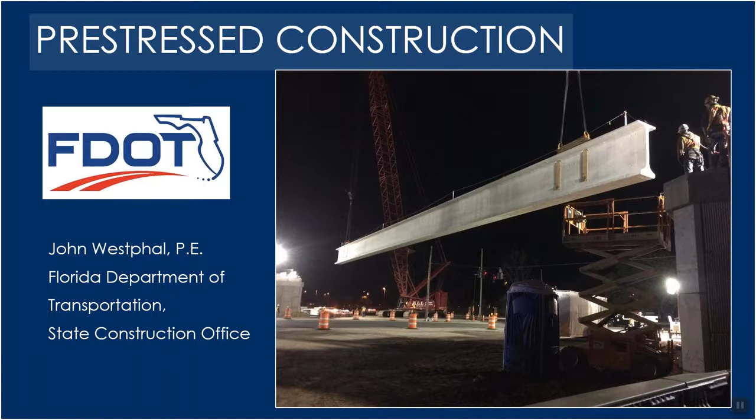And now, today's guest. Hello and welcome. Today we're going to be talking about pre-stressed construction, what it is, and why it's of importance, especially in the state of Florida and as it relates to Florida's transportation system. My name is John Westphal. I work for the Florida Department of Transportation, State Construction Office. So let's get into it.

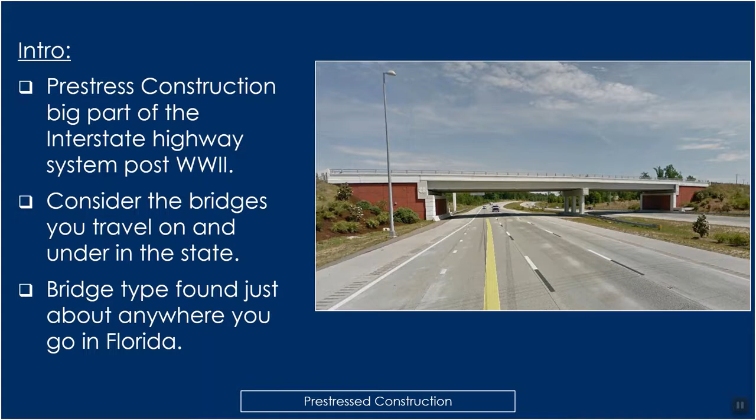Post-World War II, pre-stressed construction played a pretty vital role in the interstate highway system promulgated by President Dwight Eisenhower. Consider all the bridges that you drive on and under and along. More than likely, if you've come to work today and traveled over a bridge, it was likely over a pre-stressed concrete girder bridge. It's a very prevalent bridge type, superstructure type, found virtually anywhere in the state. It is the workhorse superstructure type in Florida, owing to its ease of construction and ability to be erected in a fairly straightforward and easy manner.

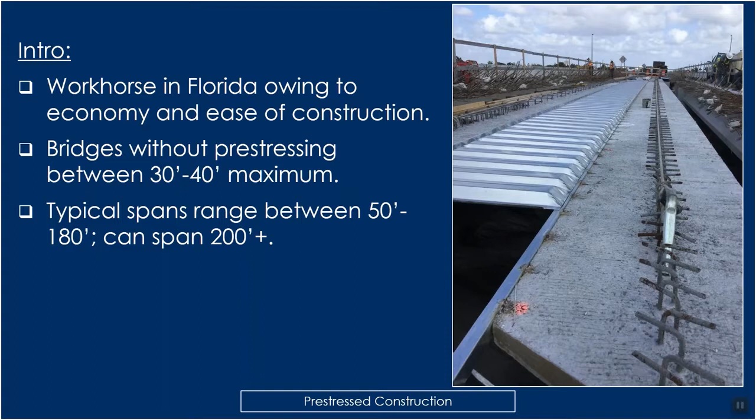Non-pre-stressed, or conventionally reinforced, or mild reinforced concrete typical spans max out anywhere from the mid-30s to mid-40s at the absolute max for a flat slab type superstructure unit. Pre-stressed girders can range anywhere into the high 100s and low 200s. The idea of pre-stressing was thought of long before material technology made it feasible.

The physics have been there all along; it just took some time for the materials to catch up. A man named Eugene Freyssinet is considered the inventor of the concept. The first U.S. bridge built using this was in Philadelphia, Pennsylvania in 1951.

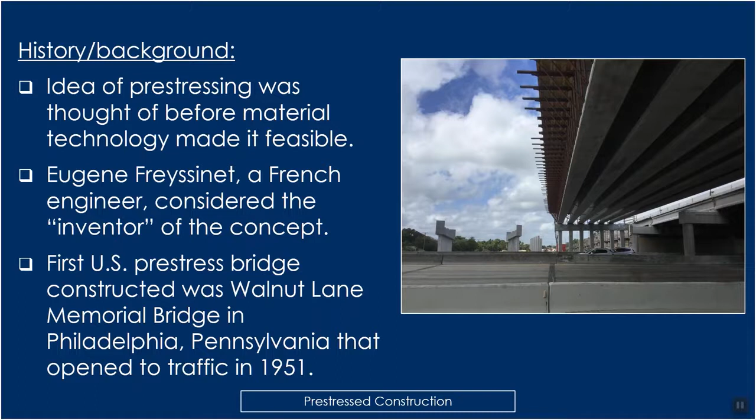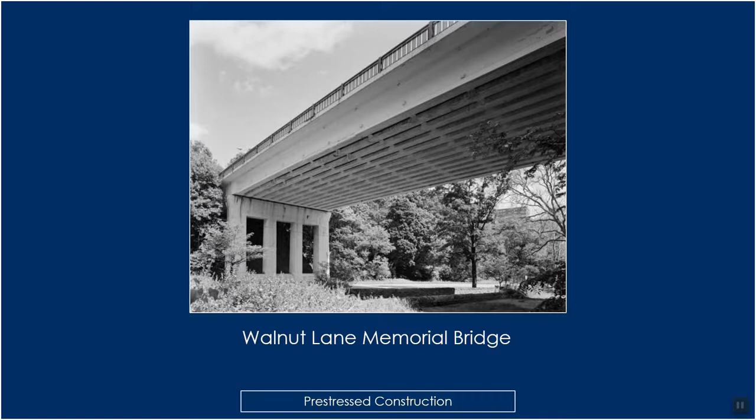Here's a picture of the Walnut Lane Memorial Bridge. This bridge is no longer in service and has been replaced. However, observe how similar this bridge looks to any bridge that you drive on or under even now. It doesn't look altogether very much different.

So, to go into a little more detail as to what makes it different from typical reinforced concrete, pre-stressed concrete uses strands rather than bars or rebar that you see all the time. Beams and piles are typically built at precast yards and shipped to project sites. There are three major ways in which these two methods of reinforcing the bridge differ from one another.

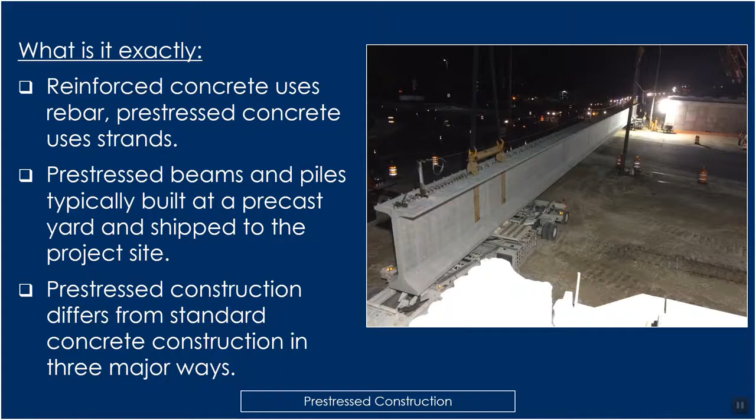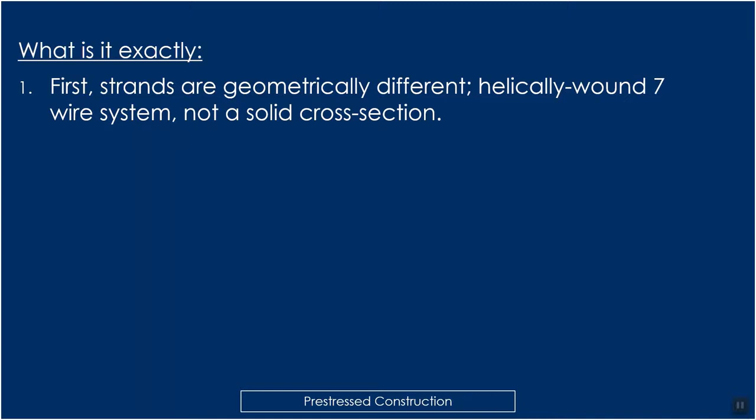For one, consider the geometrics. Pre-stressed strand is just that: it is a 7-wire helically wound system and is not a solid cross-section. The two materials are made differently and thus have different material properties.

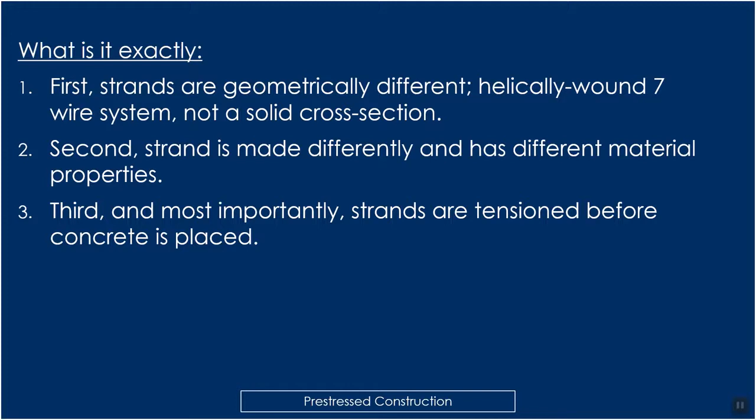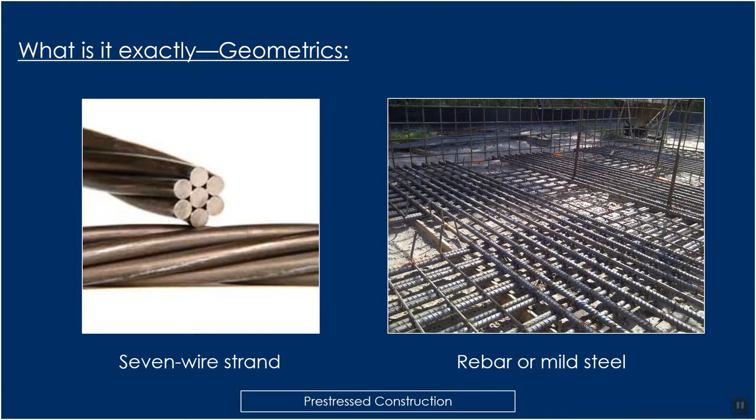Third, and most importantly, as the name denotes, strands are tensioned before concrete is placed. So we keep saying pre-stressed concrete; there's a reason for that. This is to give you an idea of what strand looks like. As I said, it's a 7-wire system, 6 wires wrapped around a king wire. On the right, typical reinforcement, rebar or mild steel, are solid bars with ribs around them.

Because pre-stressing steel is tensioned or stressed, it has to behave differently. This is what I alluded to earlier about material technology needing to catch up with the physics. Rebar is a grade 60 material; its yield stress is around 60,000 psi, or 60 ksi, basically kilo-psi. Pre-stressing steel, on the other hand, is grade 270, meaning its yield stress is 240,000 pounds per square inch, or 240 ksi. This is fine and great, but what is yield and why is it important?

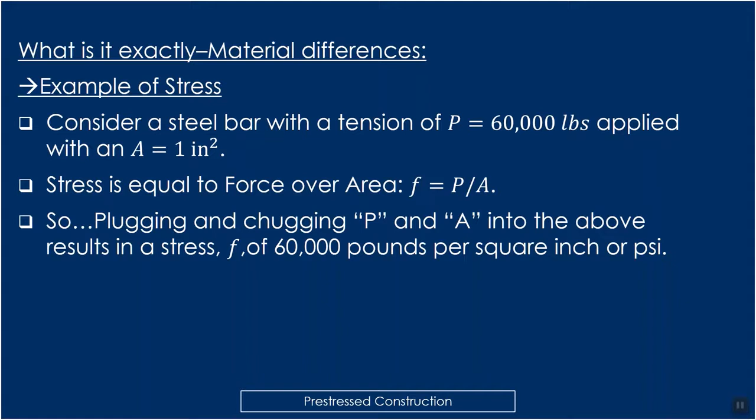Well, it's hugely important, we'll get to that in a moment, and it's partly the reason why pre-stressing is able to do what it does. Consider a bar that has a cross-sectional area of 1 inch squared. Stress is simply equal to force over area: F, stress, equals P, your force, over A, your area. So a pretty straightforward computation: 60,000 pounds divided by 1 inch squared yields a stress of 60,000 pounds per square inch, or psi.

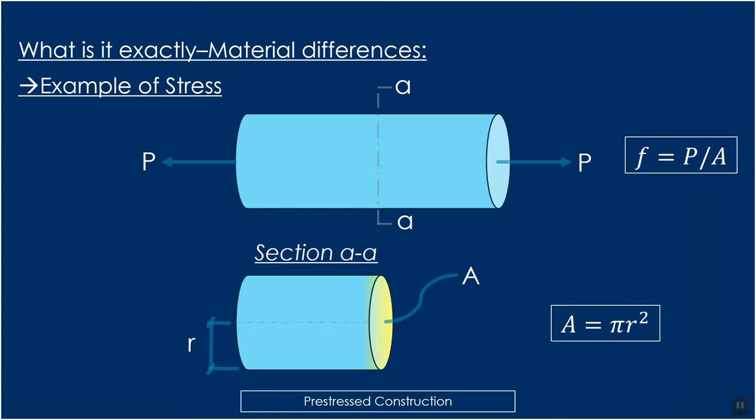Graphically, this is what that looks like. Consider a cylindrical bar with a force P exerted on it. That P is exerted over that cross-sectional area A, which you may or may not remember from math class. The area is equal to pi times your radius squared.

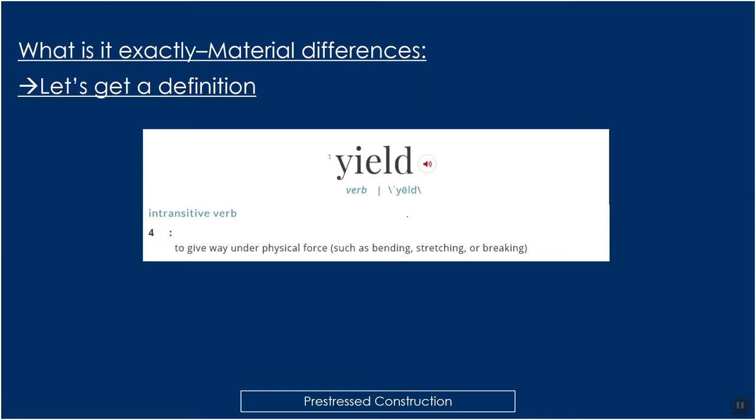What is yield? This is the best definition I could find, courtesy of Merriam-Webster. Yield, in an intransitive verb sense—somebody out there can check me on my grammar—but in this sense it is to give way under physical force, such as bending, stretching, or breaking.

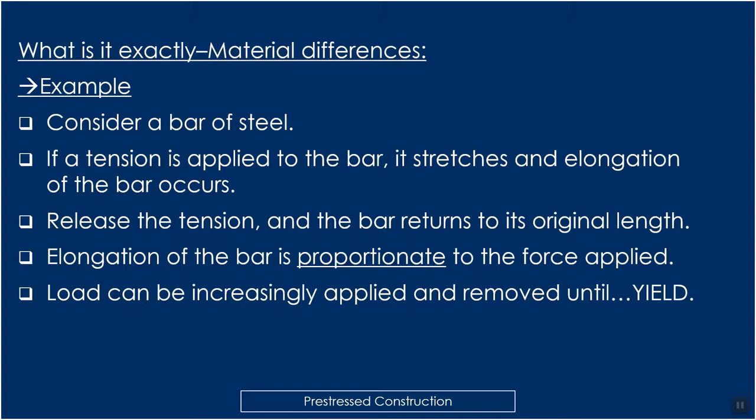Another example for you: let's consider a bar of steel, and a tension applied to that bar, a tensile force, stretching and pulling it. If you release the tension, the bar is going to return to its original length. That pull or elongation is proportionate to the force applied. So you can pull and release on that bar all day until you pull too far and you've yielded it.

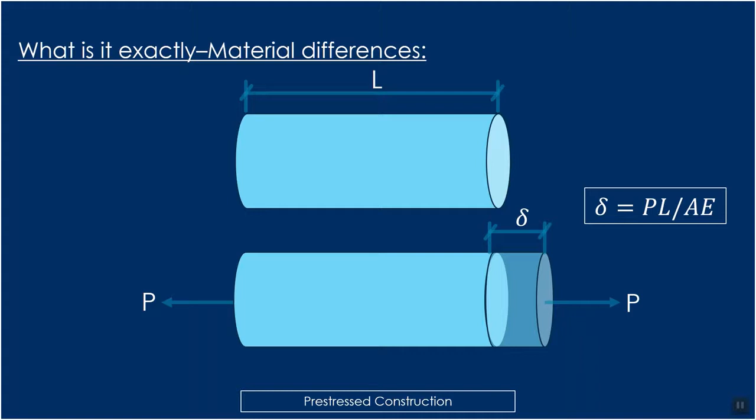This says your change in length, delta, is equal to your force times your length over your area times a constant for a material, E. We won't get into that exactly, but it gives an indication as to how stretchy a material is. Each material has its own E, the modulus of elasticity.

Yield stress is a limit. Every material has an inherent limit on its yield.

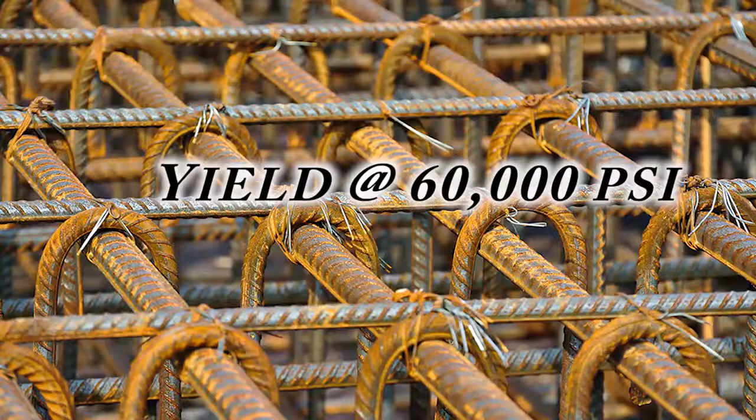Let's look at the differences between rebar and strand. Rebar is going to yield at 60,000 psi, whereas strand yields at 240,000 psi. That's over 4 times the difference, 4 times greater yield. That means you can stretch and pull on that strand with a higher load for a given area, and it's going to release and return back to its original length. You cannot do the same thing with rebar.

If you pull on a bar greater than 60,000 psi for a grade 60 material, you've yielded that bar. The benefit is that strand can be pulled with a greater force, and that's what ultimately makes the physics work behind pre-stressing.

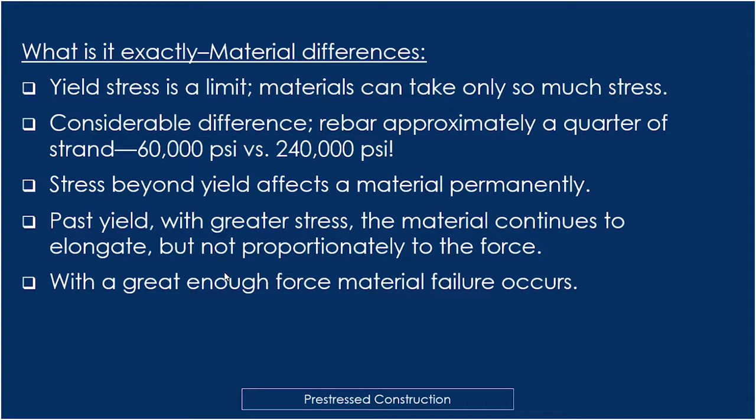Stress beyond yield means that bar, that piece of steel, is not going to return back to its original length if you've gone past yield stress. The 60,000 psi for normal steel versus 240,000 for pre-stressing: you can pull on that bar past yield, but your elongation is not going to be proportionate to the force. When you let go of it, it's not going to return to its original length. Keep pulling, and material failure will occur.

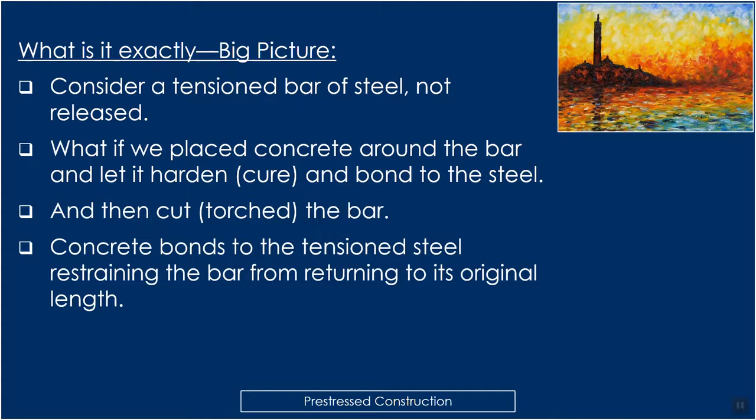So big picture, what are we looking at? Let's consider a tensioned bar of steel that's not released. What if we place concrete around that bar, let it harden and bond to the steel, and then cut or torch the bar? The concrete is going to bond to that stretched, tensioned steel bar and will restrain it from returning to its original length.

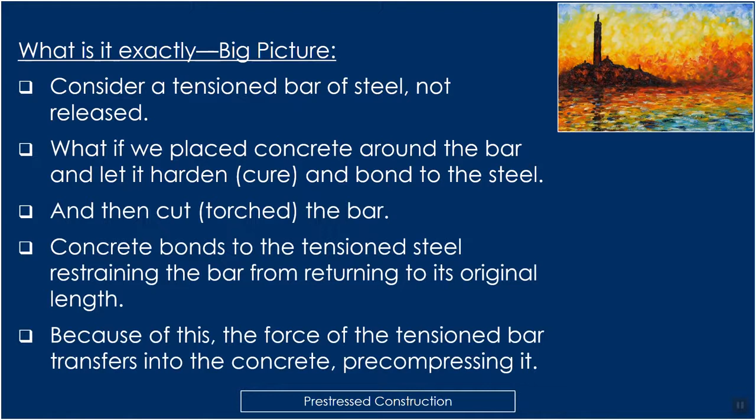So what does that do? That's ultimately going to lock in that tendency of the bar to want to stretch back to its original length. That energy basically transmits into the concrete through the bond between the steel and the concrete, resulting in pre-compression.

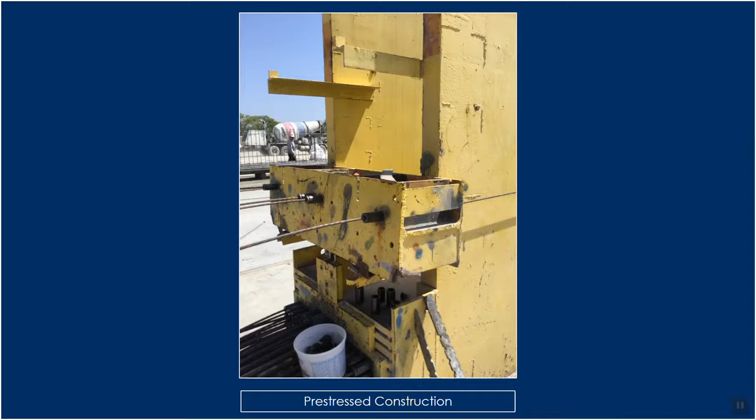Out in the field, out in a pre-stressed yard, this is what the anchorage system looks like for these strands that are tensioned. This is the dead end, if you will, of the stressing operation. The steel is being pulled on the other end. This is simply the anchorage point for a pre-stressed girder about to be placed.

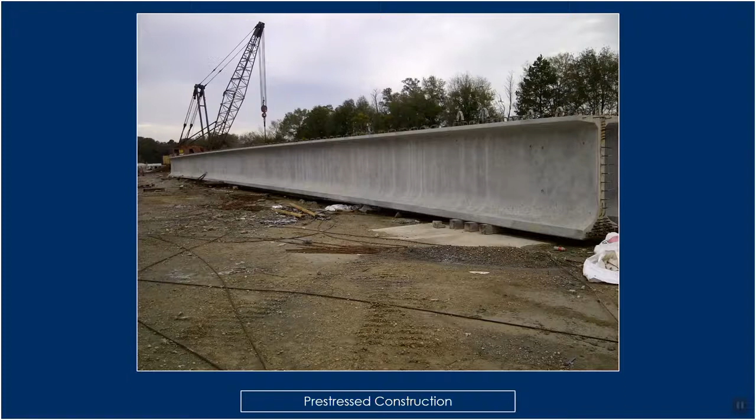So fundamentally, all materials behave in a spring-like way. Consider various materials: wood, aluminum, concrete, glass, rubber, plastic. What happens when we push and pull on these materials? As I said before, with this concept of modulus of elasticity E, every material has a specific ability to stretch, some better than others. Some are better at being pulled, some better at being pushed against - tension versus compression.

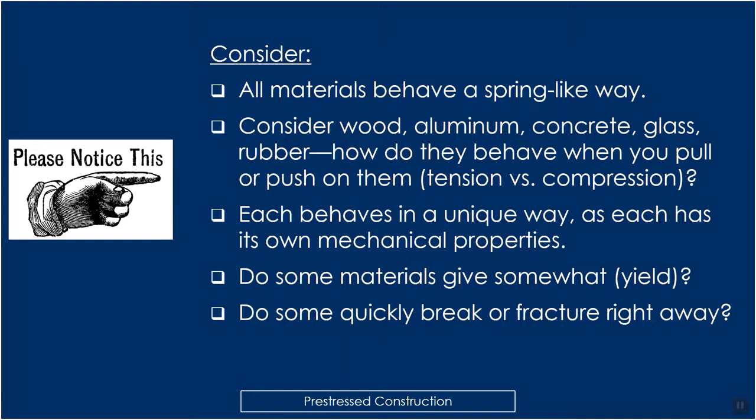So think about some of the materials you deal with on an everyday basis. Are there some materials that might break readily when you go to bend it? Are there some that become stretchy or yield? Are there some that just fracture right away? Well, we reinforce concrete. But why do we do that? Why are we always making such a fuss about reinforcing concrete?

Truth of the matter is, concrete is a very brittle material. It's very good in compression - you can push on it, squeeze it all day, it's very good in that sense. However, when you go to bend it or put it in tension, it's not very good at all. So concrete is what we would consider a brittle material. Steel, on the other hand, is a ductile material. It is very good in tension and will elongate quite a bit before it actually fails.

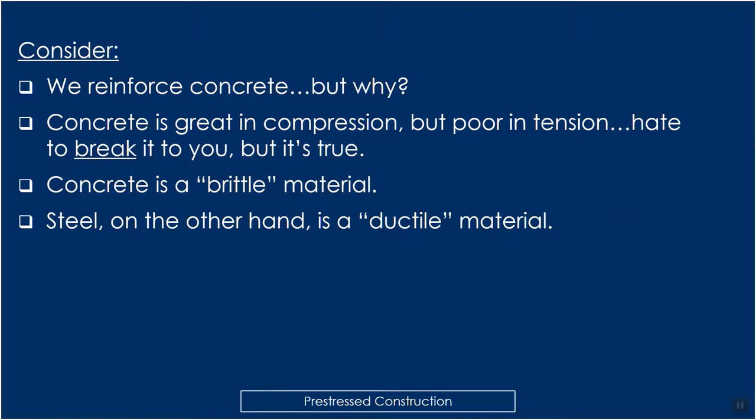To make up for concrete's poor tensile strength, we basically place reinforcing in zones of tension. Not only in zones of tension, but primarily that is the function of reinforcing steel. Reinforcing steel also tends to restrain cracking and provides an overall skeleton of reinforcing to keep the concrete from cracking in other ways, from shrinkage while it's curing or from creep, which is what happens when concrete is loaded. It creeps, it tends to move under a sustained load. So these various mechanisms are why we reinforce concrete.

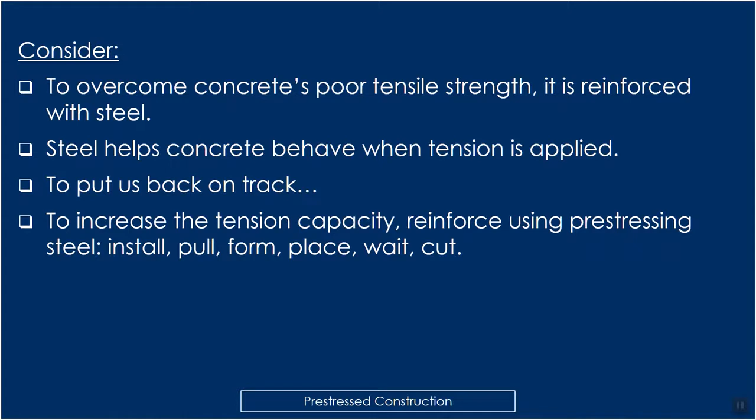So steel helps the concrete to behave when tension is applied. To increase the tension capacity of a section of concrete, we reinforce with pre-stressing steel. We install, pull, form, place, wait, and cut.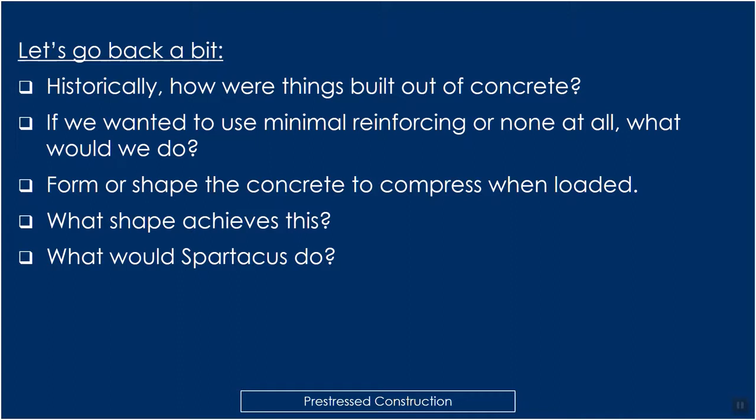So let's go back a bit. In fact, let's go back thousands of years. We didn't want to use reinforcing at all. If we only had concrete to use, how could we form or shape the concrete in a way to make it behave? Ultimately, you got to ask, what would Spartacus do?

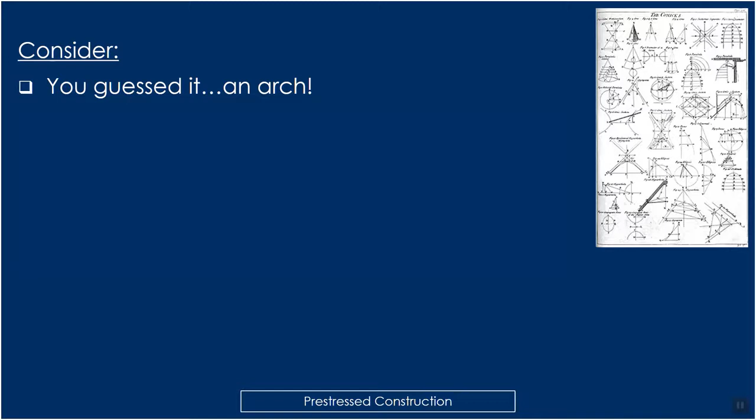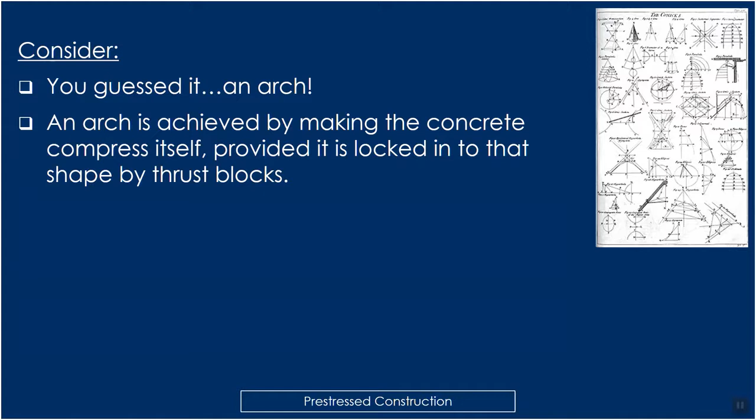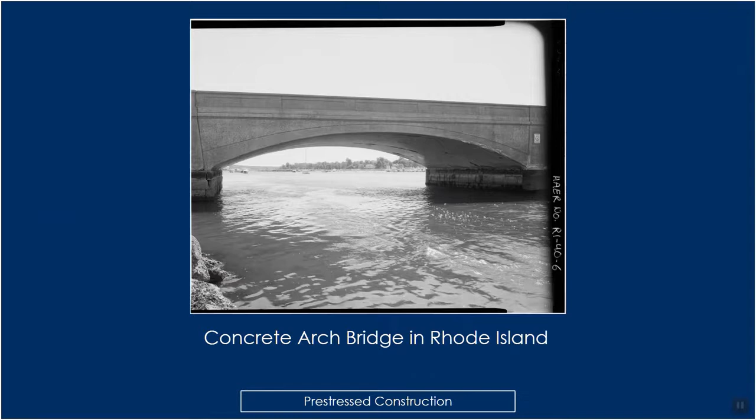Well, you guessed it, an arch. And if you didn't guess it, well, now you know. An arch is a shape that's able to accommodate loading without reinforcing. Because concrete is so good in compression, if you form it in such a way that it compresses on itself, then you don't need reinforcing. So when you're in Rome or Rhode Island, use an arch. This is a concrete arch bridge in Rhode Island. There are many like it in the state. It's an aesthetic shape, highly functional, and very durable, I might add.

Here, given this is a masonry arch, this is not a cast-in-place type operation. What you have are discrete elements that are placed together. You don't even need material that's continuous. You simply need to be able to place those elements together such that when gravity does its thing and pulls it to the ground, it compresses the pieces together. That's why you're able to get this aqueduct to work.

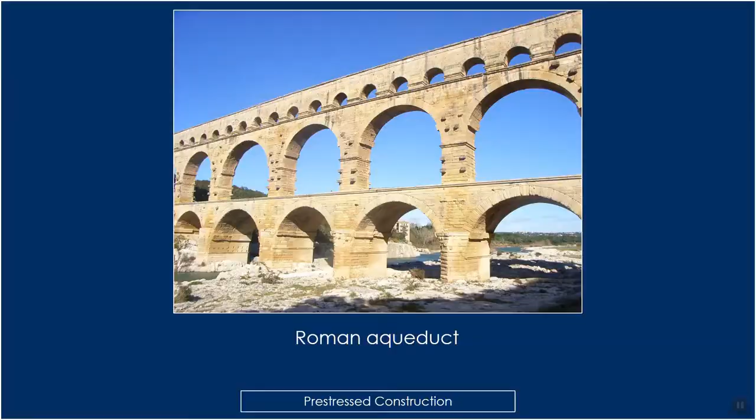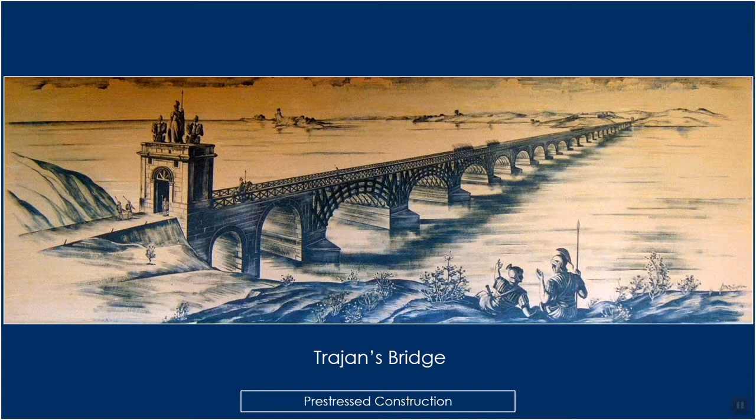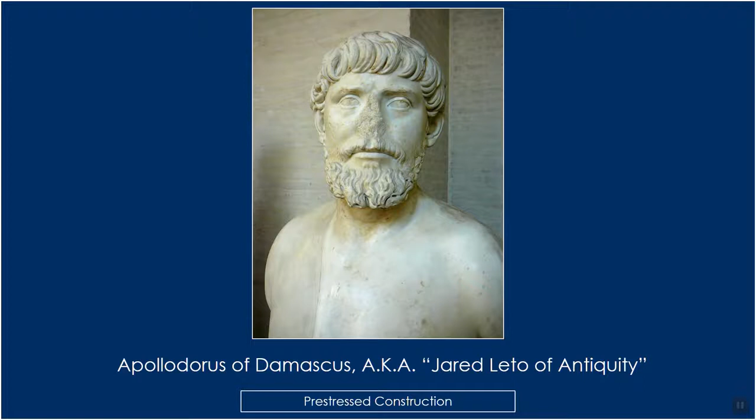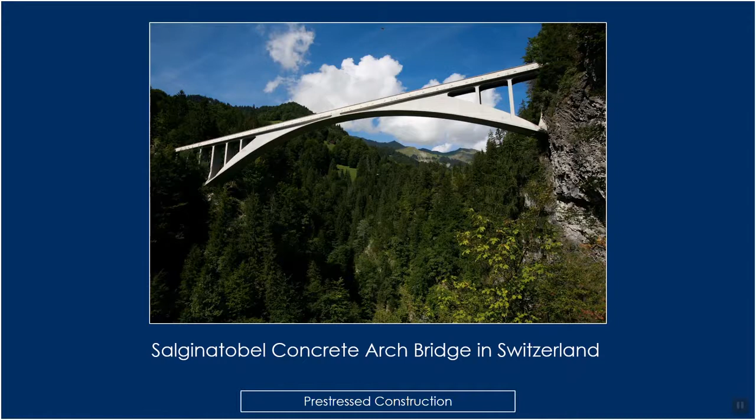Here we have the Lawton Chiles Memorial Bridge in Ocala, or not. Psych you out a little bit, make sure you're paying attention out there. No, this is a bridge in Switzerland, and if I'm pronouncing it right, it's the Salginatobel concrete arch bridge. Very scenic, very striking bridge. This bridge was built by Robert Maillart, a Swiss engineer.

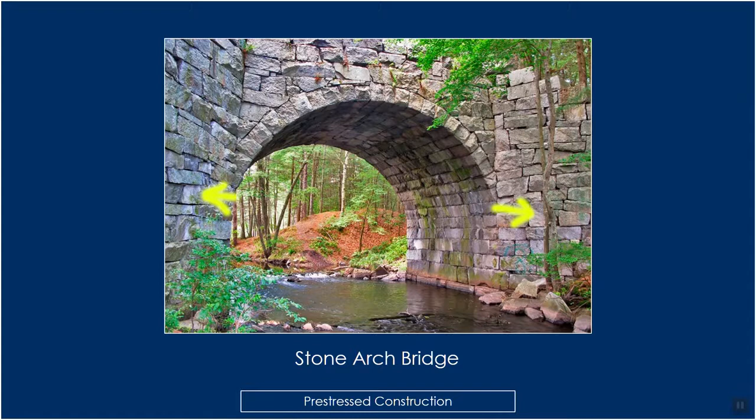Here's just another humble example of a little stone arch bridge over a creek. Now, as I said, you are able to place single elements in such a way that these elements are restrained on the left and right by what's called thrust blocks, which keeps the arch from wanting to splay out. And because you restrain it in that way, when you apply that load, those pieces all bear in on one another.

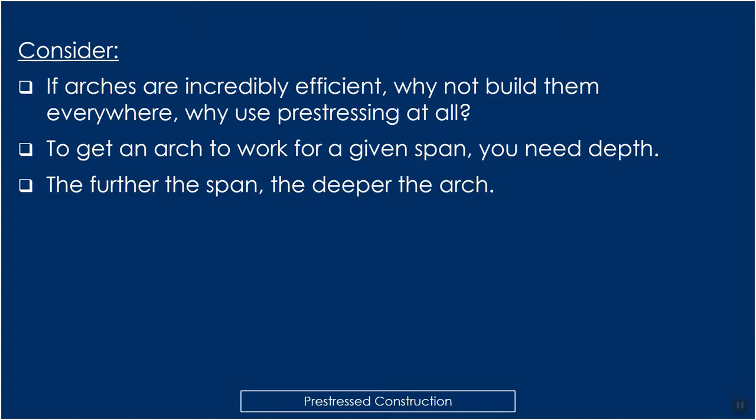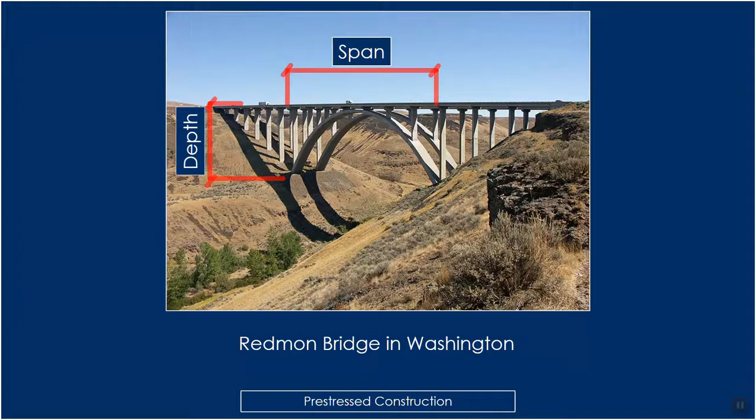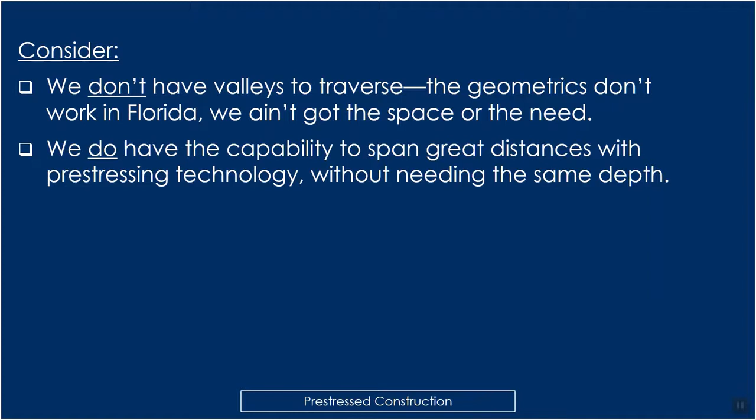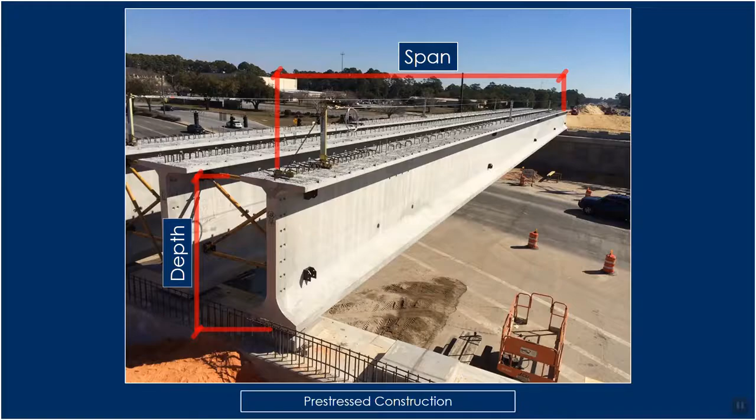So for a pre-stressed girder, that's a pretty deep beam. However, if it were an arch, it would have had to have been much deeper. So what this pre-stressing does, it forces the concrete to behave as though it were an arch. Well, you may be like these boys down here and say to yourself, that doesn't make any sense. How do we do that?

Well, an arch is formed or restrained to be entirely in compression when it's under its service load. So how does pre-stressed concrete mimic this effect? Well, concrete is placed into compression throughout its entire length by pre-compression from the steel. The amount of needed force at the end depends on the loads directly related to span length, the self-weight of the girder, the deck, the barrier, the live load, utilities, etc.

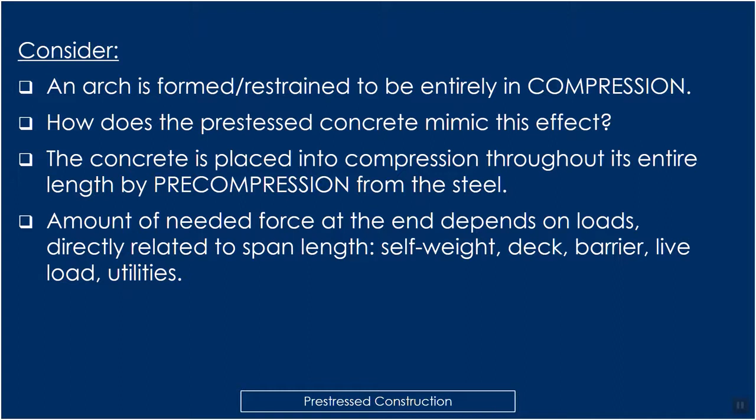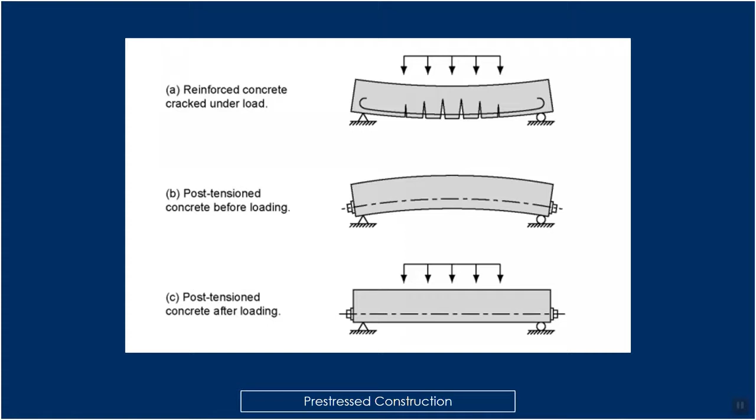Going back to this graphic that we looked at before, as we said, without pre-compression, under a given load, the beam will crack. Even though it is reinforced, there will be cracking that results. However, if you apply a pre-compression to resist, and you can do this in a calculated way, you can calculate the amount of pre-stressing you need to counteract a given load, such that when that load is applied, you get no cracking. And the steel and the concrete work together.

So bringing this around to Florida work, FDOT, what things do we do that are impacted or impact pre-stressed construction? We have specification 450, that is our pre-stressed construction spec. We have our CPAM chapter 10.2 for our consultant CEI inspectors. That pertains to pre-stressing, pre-stressed construction. We also have design standards, or standard plans as they're going to be called now, for pre-stressed girders.

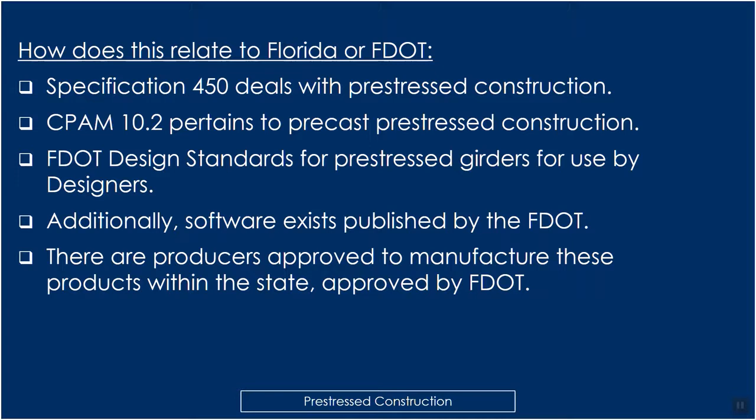There's software that exists that's published by the DOT. This is software that I've had the chance to work on at an earlier point in my career. Also, we must have the producers that we pre-qualified to do this work for us. So there are many different aspects, many different disciplines that are involved with this construction. We have design, materials, and construction. We all work together. We all have our respective areas that we get involved with.

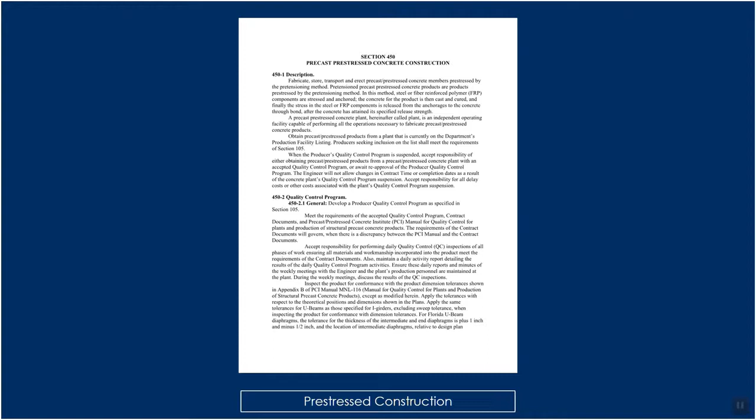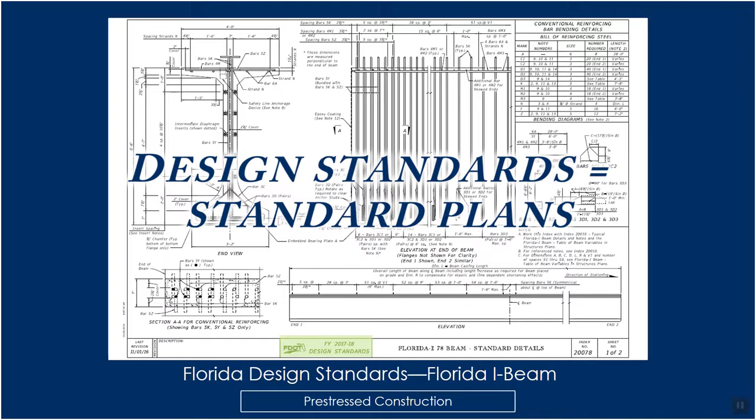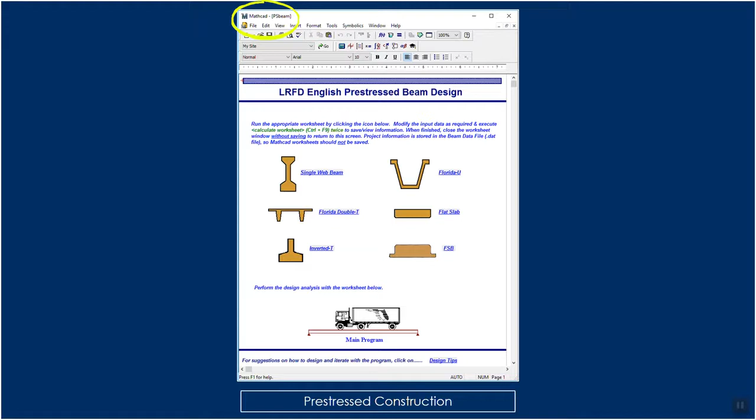This is a shot of our first page of section 450, our prestressed concrete spec. This is 10.2 of CPAM for our consultant CEIs that are doing inspection. This is an example drawing from our design standards, or like I said, what will be called standard plans in the future moving forward. Shows the typical reinforcing that you would have for a standard beam. And as I said, we have software that helps designers do computations and calculations for bridge designs.

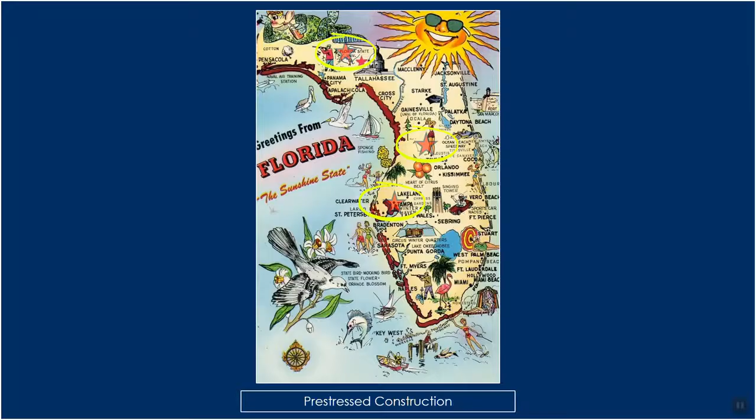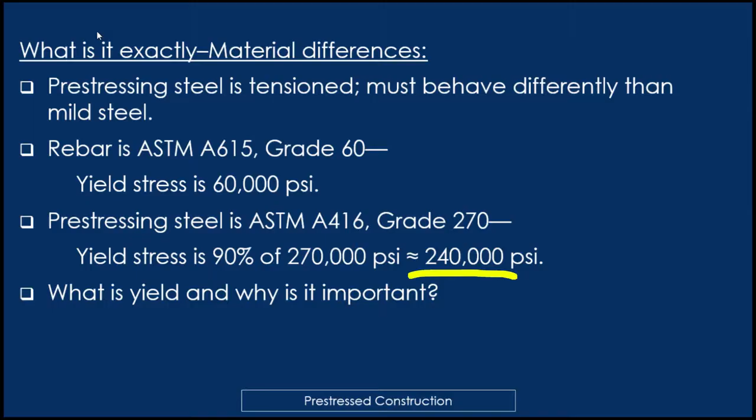So as a practical exercise, if you will, I want those of you out there to take a guess as to how much force does a beam actually need. Well, let's look at these beams, for example. So as we said before, the yield strength of strand is about 240,000 pounds per square inch.

Now, when we go to pre-stress these elements, are we going to pull these strands to that point? Are we going to pull them to yield? Well, no, we're not. We're actually going to pull the strands to about 75% of their ultimate strength, or about 83% of their yield, which is somewhere in the neighborhood of 200,000 pounds per square inch. So we don't want to yield these things, but we do want to get the benefit of the material.

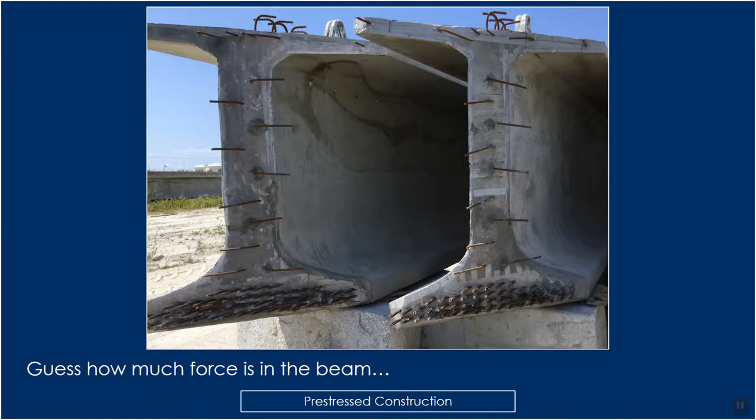So you can do, if you know what your area is for a strand, you can compute what this force is. And ultimately, what we put on each strand is in the neighborhood of 42,000 pounds initially on each one of these strands. So if you were to count these strands and do a rough estimate of the resulting compression at the end of this beam, you would arrive at about 2 million pounds of force, or 1,000 tons, that are on these beams.

So that's quite a bit. So simply it's the force of one strand multiplied by the total number of strands. So it takes a good bit. So it's a good thing that we've got this material that's able to perform in such a way to do this, to span the spans that we need here in the state.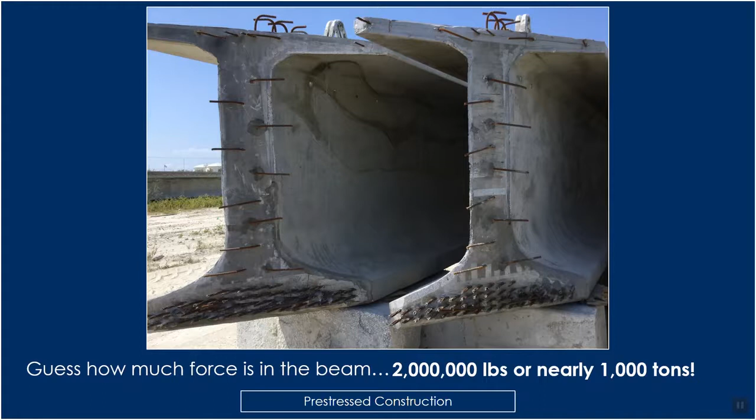And here's an example of the technology and the historical arch being kind of married together perfectly. This is the Natchez Trace Parkway Bridge up in Tennessee outside of Nashville. So you've got post-tensioned arch with post-tension superstructure. Post-tensioning is basically the same thing as pre-stressing, however it's more so as to when the force is applied.

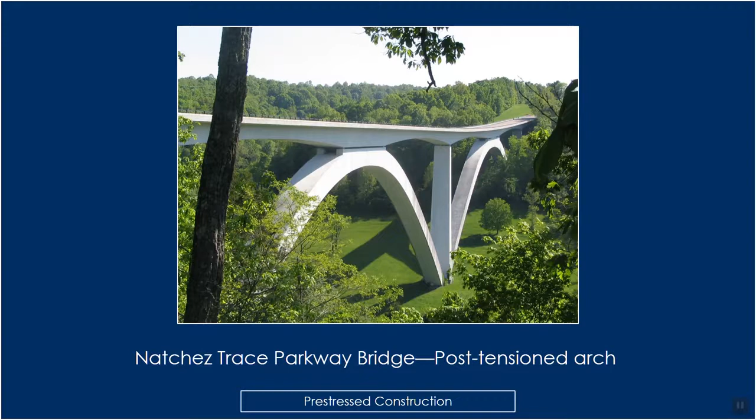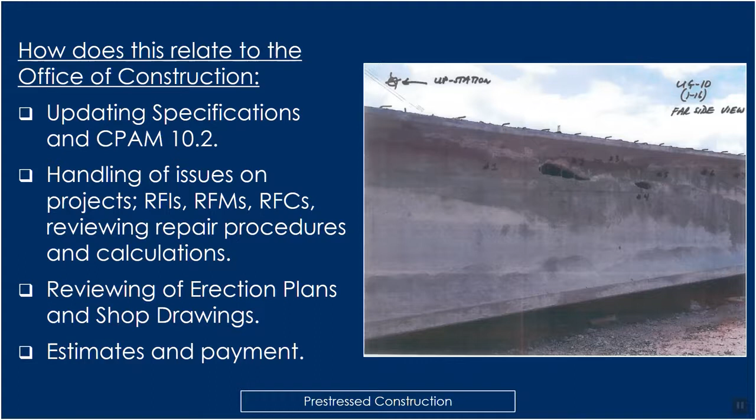So again, relating it back to the Office of Construction, we update specifications and CPAM Chapter 10.2. We handle issues as it relates to deficiencies in girders, whether they be RFIs or RFMs, RFCs, which are requests for information, modification, and correction, respectively. We will review repair procedures as well as calculations. We may review erection plans and shop drawings. And our office also deals with estimate and payment of these girders, which are done on a linear foot basis.

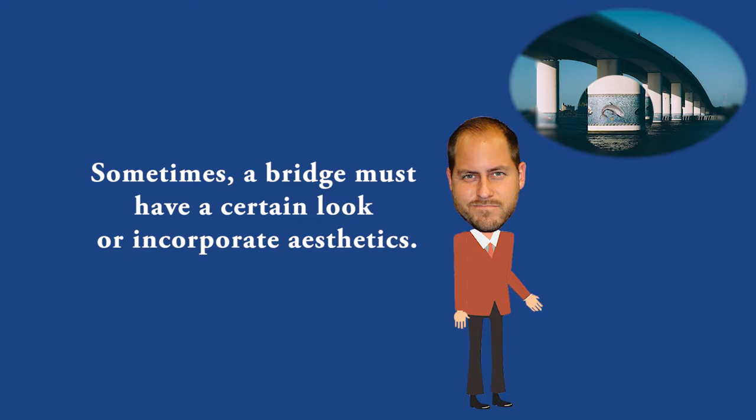Pre-stressing is oftentimes the bridge type of choice in Florida given its economy and function. Sometimes, a bridge must have a certain look or incorporate aesthetics, in which case the extra cost is built into the project to cover the premium expense.

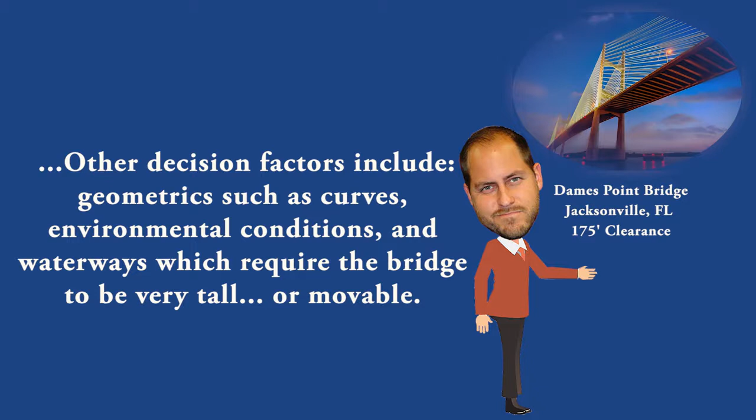Other aspects which may affect what a bridge type will be includes geometrics such as curves, environmental conditions such as being near the coast or traversing a waterway, which requires the bridge to either be very tall or, if not very tall, movable, or a bascule bridge, if you will. The process in the Florida DOT of vetting these various bridge types is called the Bridge Development Report, or BDR, which is done in the preliminary stages of bridge design for a project.